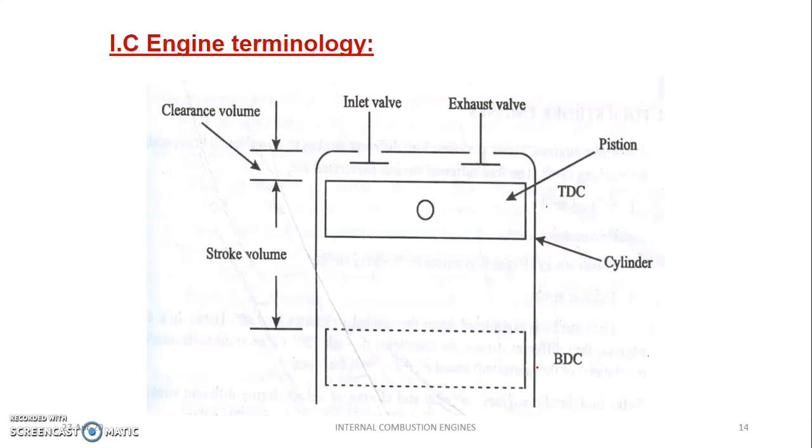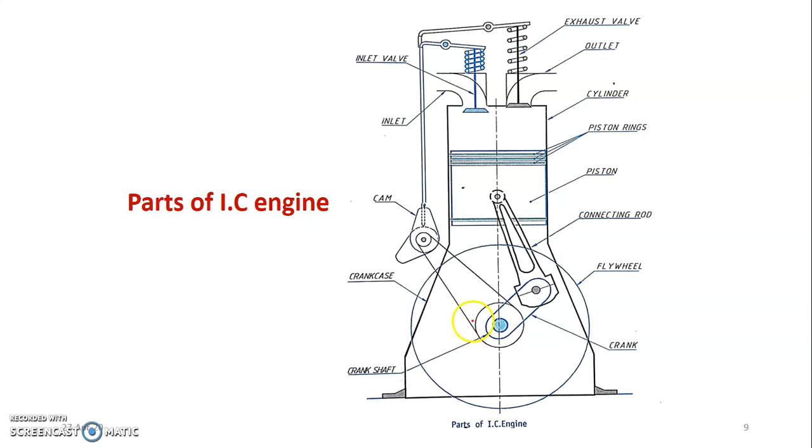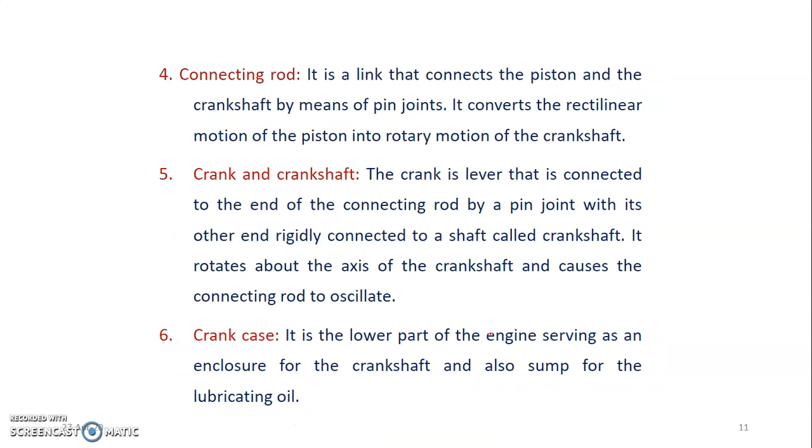That rotary motion is transferred to the crankshaft, which rotates at high speed. This high-speed rotational motion is transmitted to the clutch and then to the gearbox in the vehicle. Finally, we get rotational motion in the rear wheels of the vehicle from the engine. So the crankshaft rotates in the four-stroke petrol engine or two-stroke petrol engine - whatever the engine, the crankshaft is a very important part. Here we can see the crankshaft.

Each stroke takes place in half a rotation of the crankshaft. For every half rotation, there is one stroke in the four-stroke petrol engine. So in one full rotation of the crankshaft, there will be two strokes completed. Like this, another rotation completes another two strokes. So for every two revolutions of the crankshaft, there is one complete cycle - all four strokes are completed in two revolutions of the crankshaft.

In two of these strokes, there is no power generated. In stroke number 3, the working or power stroke, power is produced, and then exhaust gases are expelled in another stroke, the exhaust stroke. So in one revolution of the crankshaft, power is generated in the four-stroke petrol or diesel engine. In the other revolution, no power is generated.

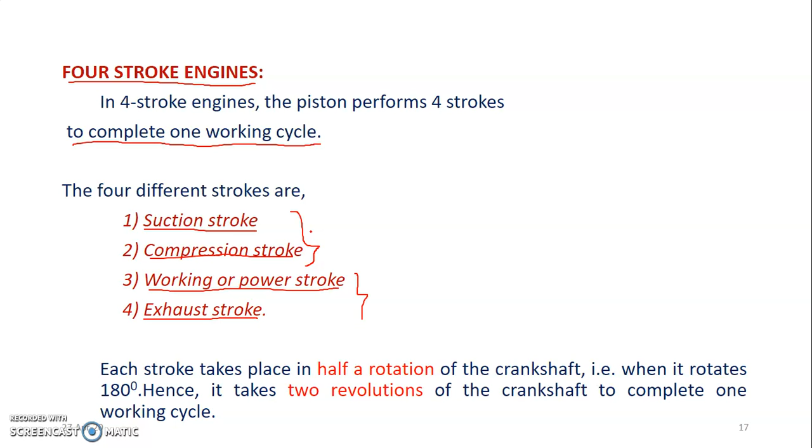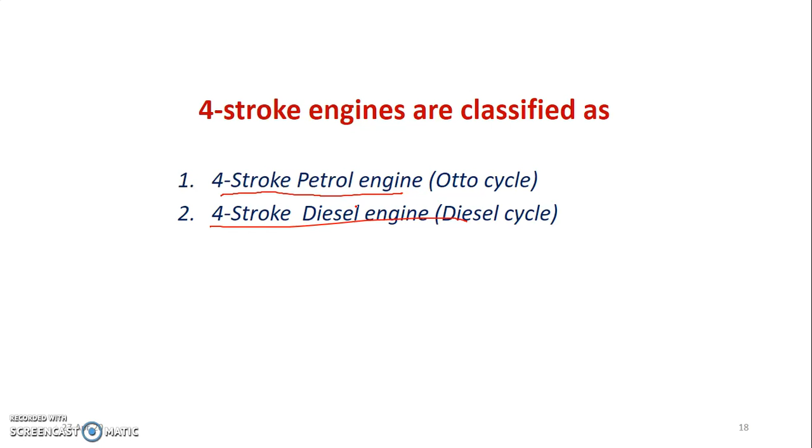Now we'll move to the next slide. Four-stroke engines are classified - we know already that a four-stroke engine may be a petrol engine or a diesel engine, based on what fuel is used: four-stroke petrol engine or four-stroke diesel engine. We'll understand one by one the working principle of the four-stroke petrol engine and the four-stroke diesel engine.

First we'll understand the working principle of the four-stroke petrol engine. It is also called the SI engine - we know already SI engine and CI engine. SI engine means spark ignition engine. The petrol engine is called SI engine because in the petrol engine we use a spark plug to produce the spark to burn the petrol.

In CI engine, that is called diesel engine, there is no spark plug used. Instead, you compress the air to very high pressure and temperature. This high pressure and temperature is sufficient to burn the diesel. When the diesel is sprayed into the high temperature air, it will burn and produce power.

This is called the SI engine. The petrol engine works on the principle of the Otto cycle. Why is it called the Otto cycle? Because the person who invented the petrol engine was named Otto, so the thermodynamic cycle in which the petrol engine works is called the Otto cycle.

It's also known as the constant volume cycle. It consists of a cylinder, which is a very important part, the heart of the engine. There is also a piston, connecting rod, crank, crankshaft, inlet valve, exhaust valve, and spark plug. These are all the main parts of the four-stroke petrol engine.

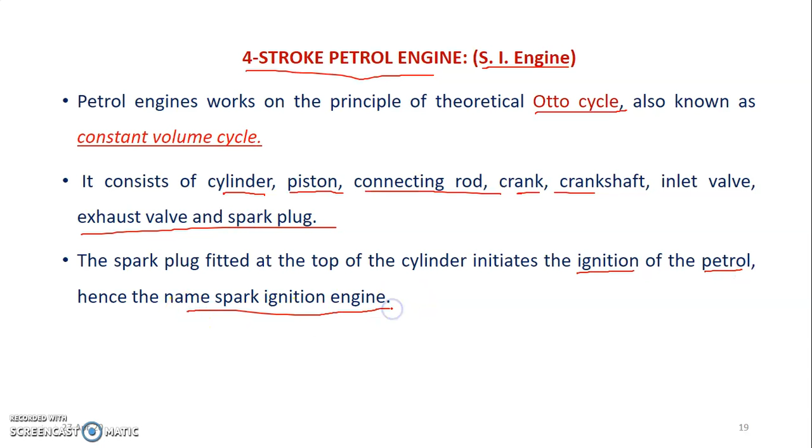The spark plug fitted at the top of the cylinder initiates the ignition of the petrol. Ignition means burning of the fuel, that is the petrol. Hence the name spark ignition engine, or shortly SI engine.

Now we'll understand one by one. What are all these four different strokes, and why are these strokes required in a four-stroke petrol engine? For each and every stroke there is one diagram, like this for all four strokes.

The first stroke we call the suction stroke. The second stroke is the compression stroke, the third is the working stroke or power stroke, and the fourth one is called the exhaust stroke. Now we'll come to the suction stroke first.

Before that, in this diagram we can observe there is a piston, this is called the inlet valve, and this is called the exhaust valve. What is the function of the inlet valve? We are discussing the petrol engine here. We can observe this is the spark plug required in the engine, this is the inlet valve, and this is the exhaust valve.

The main function of the inlet valve is to allow the air and fuel mixture into the engine cylinder. Inside the cylinder, the piston can freely move up and down. This is the connecting rod. The reciprocating movement of the piston will be converted into rotary motion in the connecting rod, and it will be transmitted finally to the crankshaft, so that the crankshaft rotates.

So the inlet valve allows the air and fuel mixture to enter inside the engine cylinder. The exhaust valve is used only to exhaust the waste gases or exhaust gases produced at the end of the working stroke, after completely burning the air and fuel mixture inside the engine cylinder.

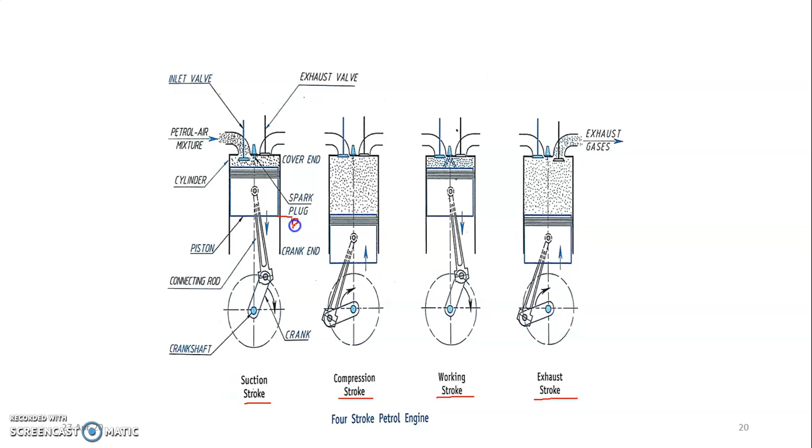Due to that, the air and fuel mixture is sucked inside the engine cylinder during the suction stroke. The piston moves down to the bottom dead center, also called BDC. So this is the first stroke, in which the air and fuel mixture is sucked inside the engine cylinder.

Now when the piston moves, come to the second diagram. This is called the compression stroke. In this stroke the piston is completely at the bottom dead center, or BDC. Here it is just moving down, so now the piston is at bottom dead center.

In this stroke, the inlet valve also closes. We can observe in this diagram that the inlet valve is closed, and the exhaust valve is also closed, so both are closed entirely. The cylinder volume is filled with air and fuel mixture. The piston again starts moving up, from bottom dead center to top dead center.

So when the piston moves from bottom dead center to top dead center, the air and fuel mixture will be compressed. This we can observe in the third diagram, that is the working stroke. In this stroke the piston is at top dead center and the air and fuel mixture is completely compressed.

When the piston reaches top dead center, the spark plug will produce the spark. When the spark is produced, the air and fuel mixture will catch fire and start burning. When it burns, high temperature and high pressure are involved.

Due to that high pressure and high temperature acting on the top surface of the piston, the piston is pushed in the downward direction at high speed. This is called the working stroke or power stroke. The actual generation or development of power takes place in the working stroke. By burning the air and fuel mixture, the piston moves at high speed in the downward direction.